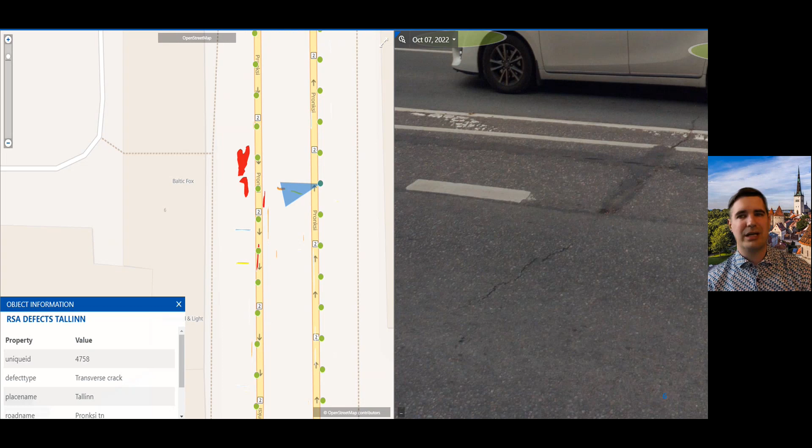So some example about mobile data capture that I was talking about before. For example, we have a car with a 360-degree camera, a little bit of machine learning, and we can already see what is actually there in our roads - how many potholes, how many cracks. You can see that every crack we have discovered has a unique ID and also the place where it's situated. And there is a picture - we can see the same place from different angles to decide how big the crack actually is.

But another point of why we are doing the digital twin is because we want to be a smart customer. The city needs to be a smart customer because the creation of a high quality living environment takes place through competencies that can be guaranteed by a smart customer and strong companies. So they can do it only together in symbiosis, but not every kind of symbiosis is healthy. I would say that the only way to lead to a high quality living environment is through mutualism. We have to have a smart customer and strong companies - positive and positive. Commensalism and parasitism, unfortunately, are not the way to deal with it.

So when are we actually implementing these services that I'm talking about? This year, we're doing the mobile data capture of the whole city. We're finishing the Green Twins project, moving to detailed green models, dynamic calculations, doing solar energy analysis, and also improving the planning registry by enabling 3D BIM-based detailed zoning plans, having the proof of concept first. In the background, we also have to deal with the processes to create a network for the digital twin, activate product owners, and create technical specifications and frameworks.

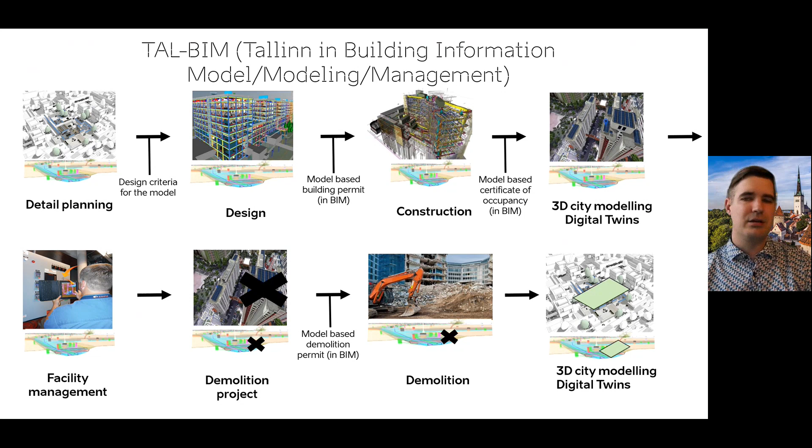Then have this building in our city model, in the 3D city model, so the digital twin viewer, I would say. Then using it in the facility management, also again in demolition. And when the building has been demolished, again, there has to be the same time representation in the digital twin, so in the 3D city model.

But going to the planning, the foundation of the building life cycle, where are we now? I would say it's a long process. It's quite long in Tallinn. It takes several years to get this kind of planning enforced.

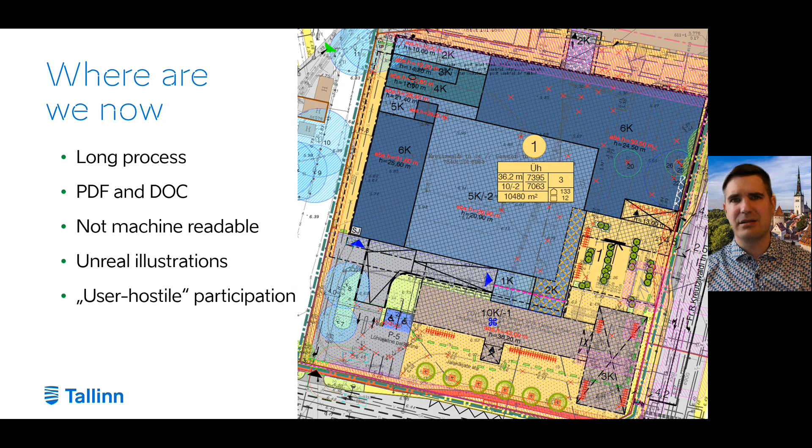We are using the PDF and doc formats for it, which are not machine readable. Therefore, also we have some kind of unreal illustrations that are not giving this kind of understanding of what is actually being built. And participation by using these 2D materials, I wouldn't say it's user-friendly, I would say it's completely user-hostile.

And by doing it, we have to ask, is this really how we get the best urban environment? I would say no. As you can see, the main drawing of the detailed zoning plan, more than 50% of this drawing is the legend of how to actually read this drawing. So what is the solution?

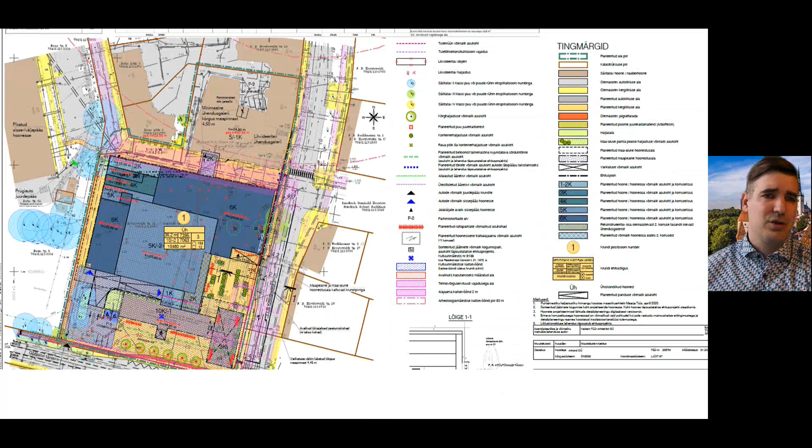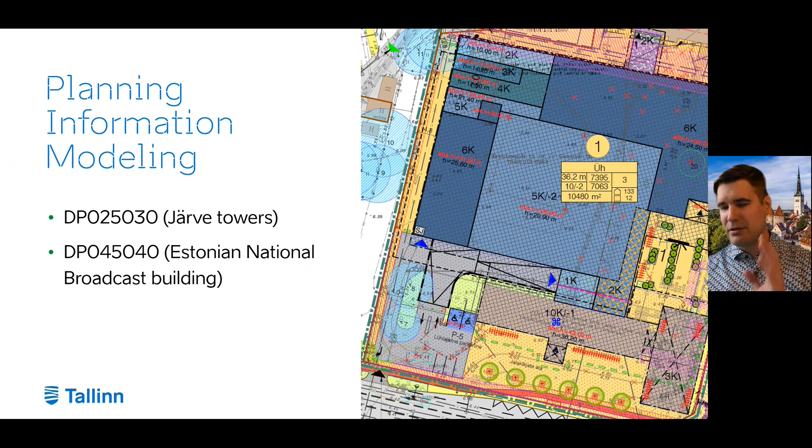I would say planning information modeling, also known as BIM-based planning, not so widely used term in the entire world because it's quite new. We did 2 pilots, one for Järve Towers and one for Estonian National Broadcast Building. The National Broadcast Building, this is the thing that you're seeing here in the background, this 2D thing.

If you can just have it back of your head when you're seeing the next slides. Järve Towers, we added them to the city model to see how it looks visually. But with this National Broadcast Building, we took a step further. And for that, I'm going to show you a small video of how it actually looks like.

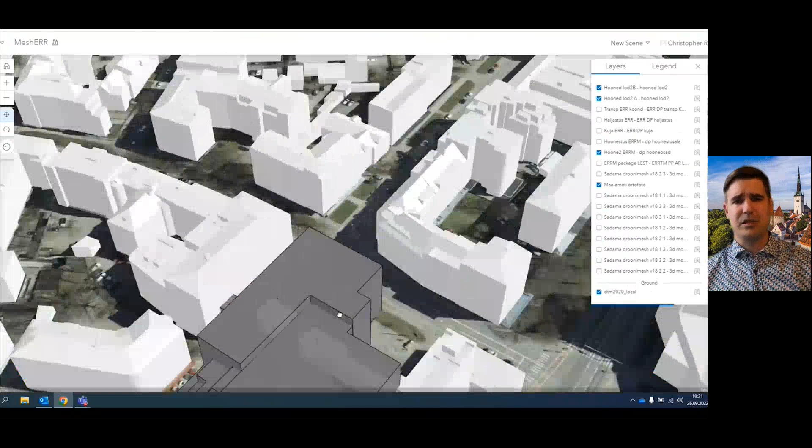So we have the different layers of the planning. For example, the area, the buildable area. This is not just 3D, it's also the data. For example, the absolute height, the number of building stories, the depth, how many building stories can there be below ground, and so on.

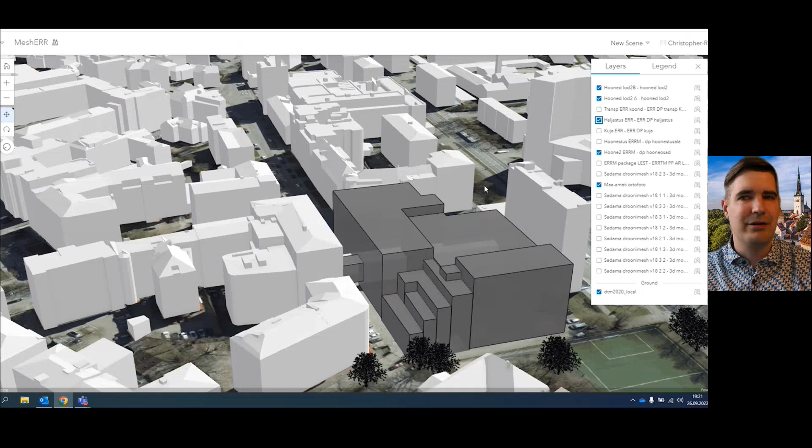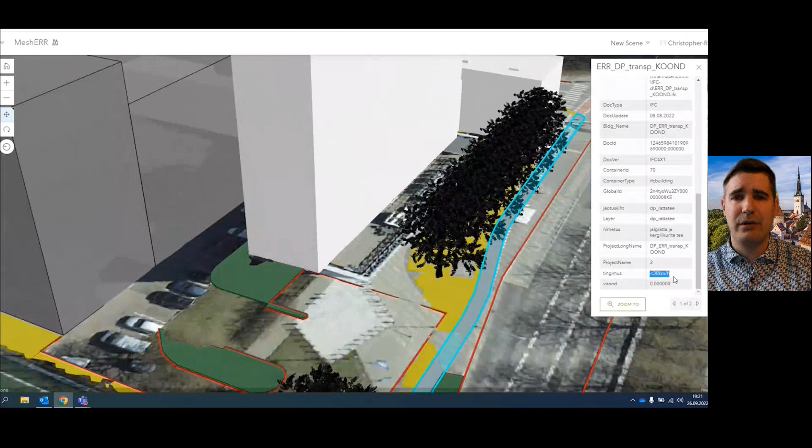Then we have this greenery, the trees. It's not just this kind of tree models to look beautiful, but it's also the data. Like, for example, there can be what is the value class of the trees, what are the species, what is the width of the tree trunk, what is the width of the tree crown, also information about the roots.

We can have the information also about the transportation layers, I would say like which area is usable only for pedestrians, which can be used for cyclists.

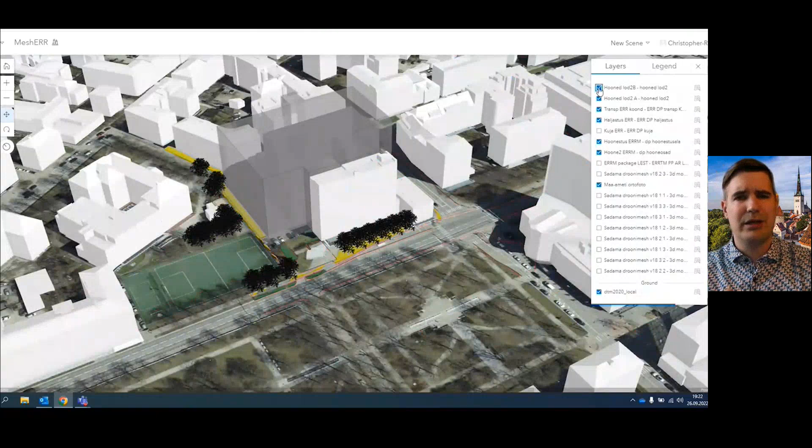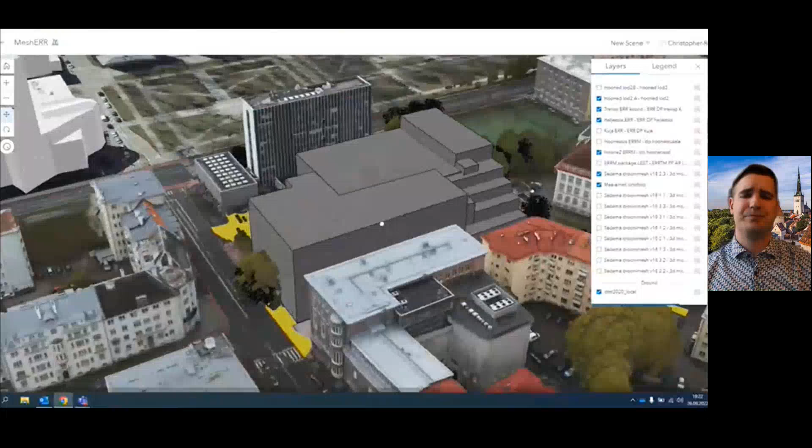But even though if we are doing it like this, there are a lot of white boxes as you were seeing. But if we switch these white boxes into actual texturalized environment, how we are seeing it in our everyday life, then it's not usable only for the architects, but for the regular people who live there in these streets, in this area, and they can actually see what's going on there, what's happening.

And also we can have this kind of utility networks visualized. What is the protection area of these utility networks? And then just zoom in and see visually.

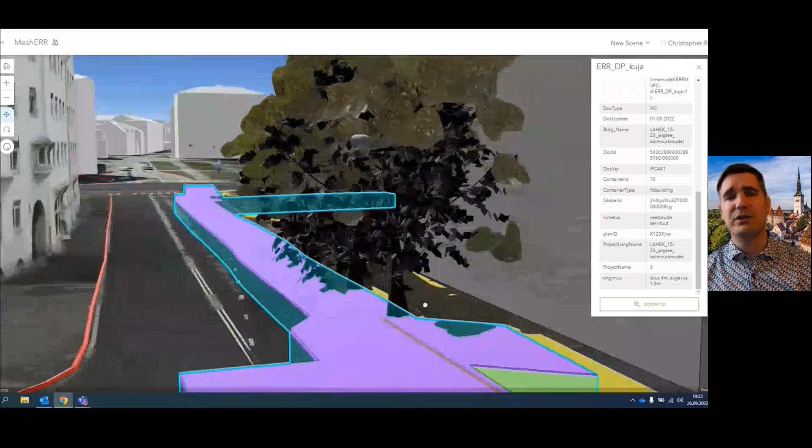We can also do automated checks, but at the moment we have to look at visually. We don't have automated checks in place. Like, can there be possibility of the conflict between the roots of the trees and the utility networks?

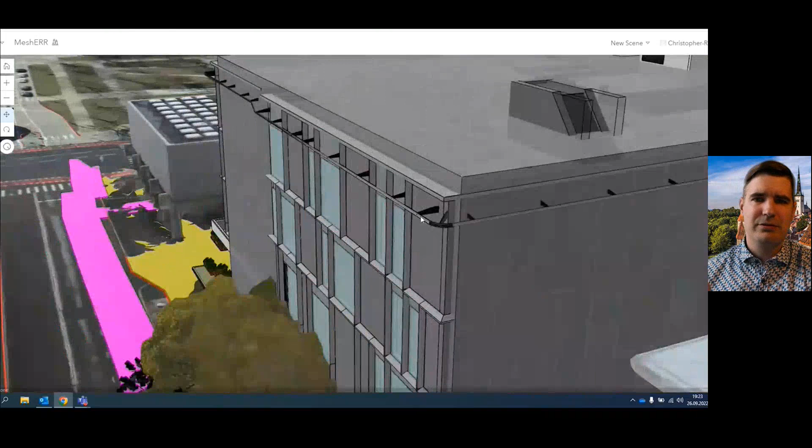But again, if we have a gray box of buildable area, and already we have this kind of building information model in IFC, Industry Foundation Classes format, the open standard, and we have added it into our viewer.

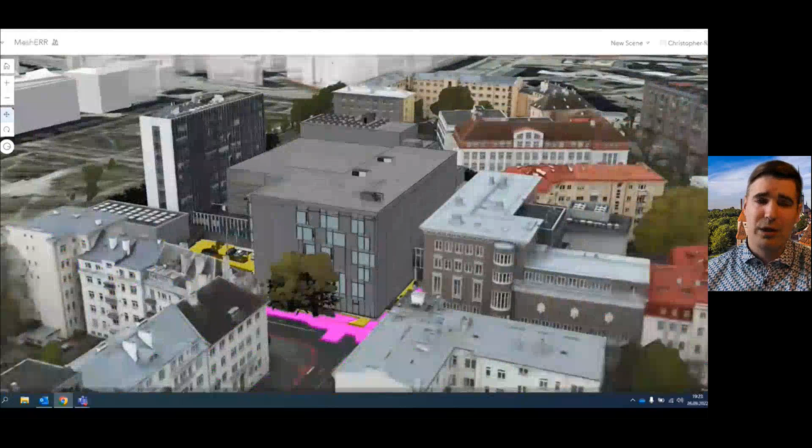Then again, we can either look at it visually, manually, or do it automatically. Is it fitting into the buildable area? And for the building, it's so much easier to just look at what the developer of this area wants to build there.

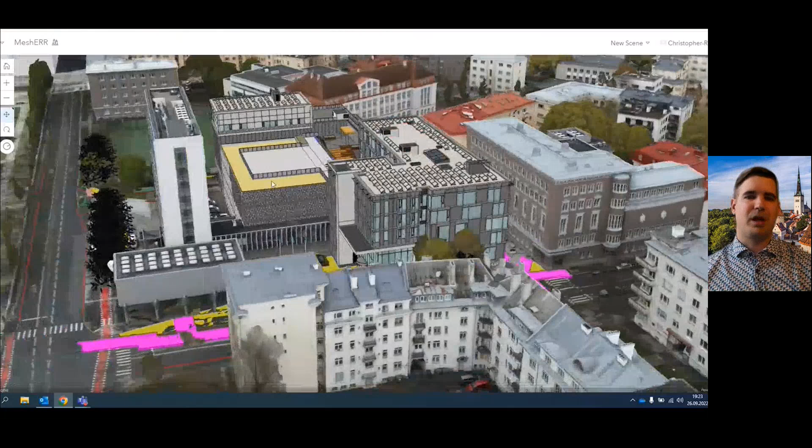It's giving so much more information than just a gray box. By developing these tools further and further, I would say this needs to happen everywhere, because compared to the hatch-on-top-of-hatch from the 2D drawing you saw a few slides back, there is a huge difference. We have to move towards simplification.

And now BIM in construction. So we are not using BIM only in the planning phase, we are doing already the construction design. In Estonia, we're developing the BIM-based building permit system so that we could actually get the building permit based on the BIM model, not only the 2D drawings and the explanatory letter, which is like a huge text document. And to use BIM in construction with its full potential, we have been developing BIM technical requirements for our contractors to fulfill.

We have implemented the common BIM requirements, which are the BIM requirements for the entire country. We're not doing BIM only for buildings, but also for facilities and infrastructure, so infra BIM. And what is extremely important for us is to use BIM in facility management, so BIM FM, because facility management is actually where most of the costs of the building take place.

And this is the main place to get a really good victory out of using BIM processes. We have created two innovation project manager positions, one in the city property department and one in the environmental and communal department, to make these processes faster to implement and to have this kind of competence in this technology field in these departments.

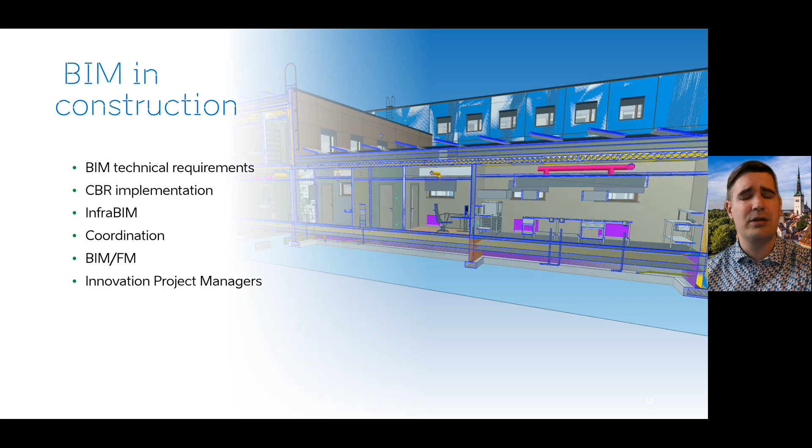Further on, I was talking about the common BIM requirements and the Tallinn Building Information Management. In order to get the best out of BIM, we have to have the correct geolocation. We need to fulfill the building registry's requirements to get the BIM-based building permits. We have to be aware that the software our contractors are using is able to bring these common BIM requirements to life.

We have set the level of geometry and detail that we want for the elements at different stages of construction design. We have demanded reports of clashes and data from the contractors, to be aware that these models presented to us as a customer are meeting all the requirements I was talking about earlier. And we are mainly using open formats like IFC, but we also need native formats so we can more easily use BIM in the different aspects of the life cycle.

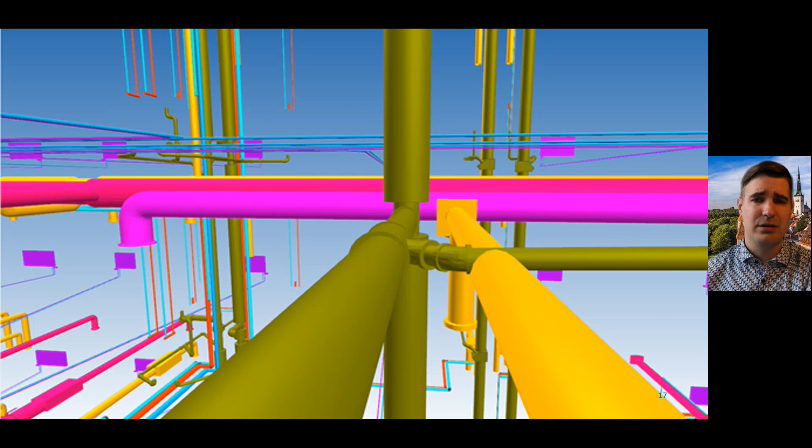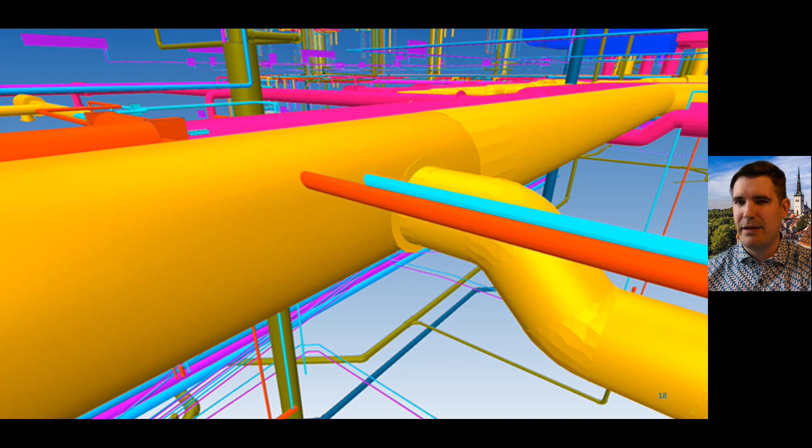So what is BIM actually helping us prevent? These kinds of mistakes on the construction site, like ventilation and canalization clashing, or water and ventilation clashing, because at the construction site these mistakes cost so much more money than just preventing them at the construction design stage. But with good construction design, we can ensure these kinds of mistakes don't happen on the construction site. And how can we do it?

Not alone. We have to have good collaboration with academia, with Tallinn University of Technology, Tallinn University of Applied Sciences, and we have quite good collaboration also with Cambridge University. This is something we're very proud of, trusting academia and the science behind it. Also, the digital construction cluster in Estonia is a very strong partner to us, along with our proximity to the state level — the Ministry of Economic Affairs and Communications and the Ministry of Finance. We also have the public sector procurer working group to do things together.

Internationally, we're developing the digital twin together with Rotterdam and Helsinki, learning from each other. And of course, we need a strong private sector to be there for us, because if we are setting the requirements and there is nothing coming back to us, then this process is not possible.